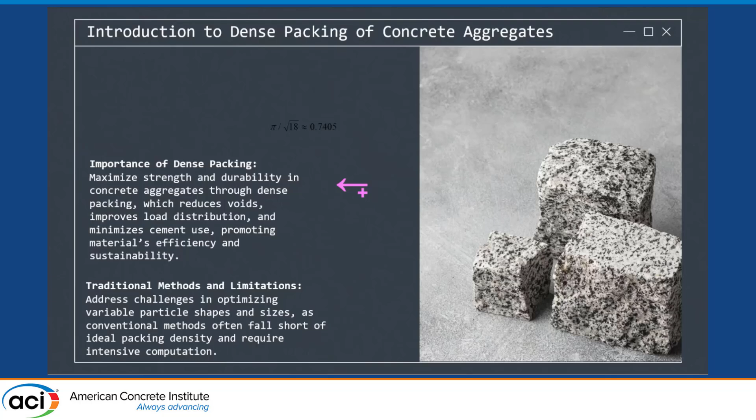And the idea of dense packing comes from, for example, Kepler, and he was discussing the packing of cannonballs, equally sized spheres, but even earlier, Apollonius, he was working on packing of disks, and he created these problems which we still try to understand and model better.

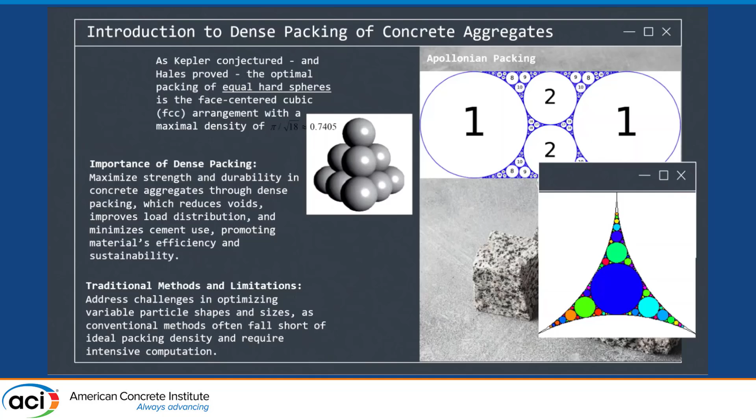Okay, mathematically, we can solve the problem for ideal packings of ideal disks and ideal spheres. And, well, the real world is a little bit different. So most of the time, we may need to deal with random Apollonian packings, which are not really perfect arrangements. And again, this is where we can use our algorithms, which can mimic nature and natural formations.

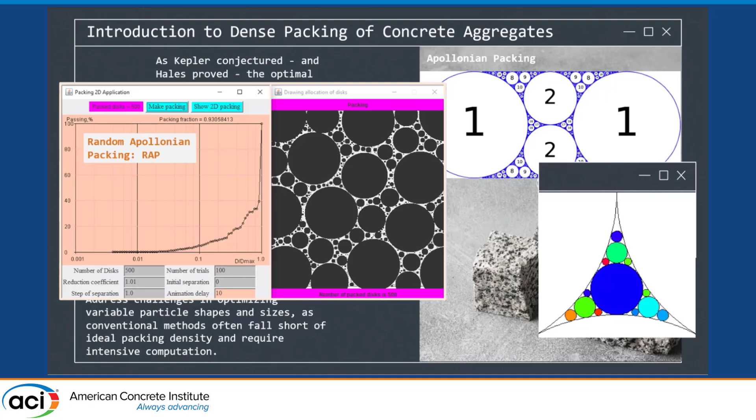And this can be used for concrete packing, understanding concrete packing and its importance, correlated to concrete properties. So the importance is very clear, because we try to optimize the packing, and our objective is to see if we can have better strength, or we can save some amount of binders. So Portland cement can be easily saved.

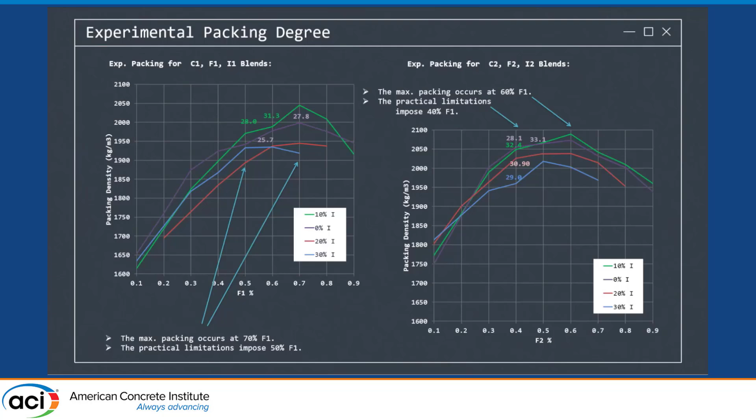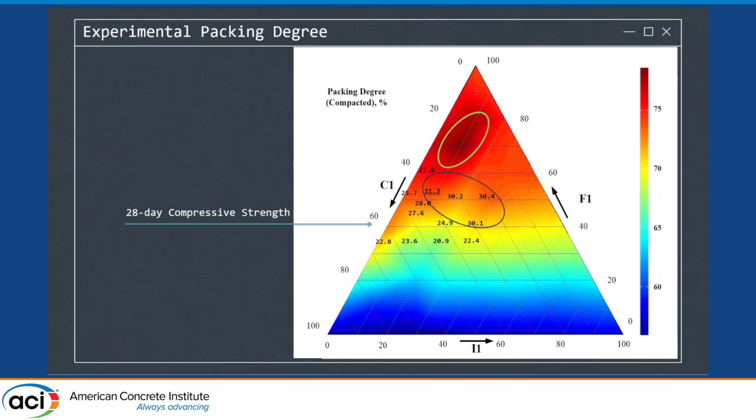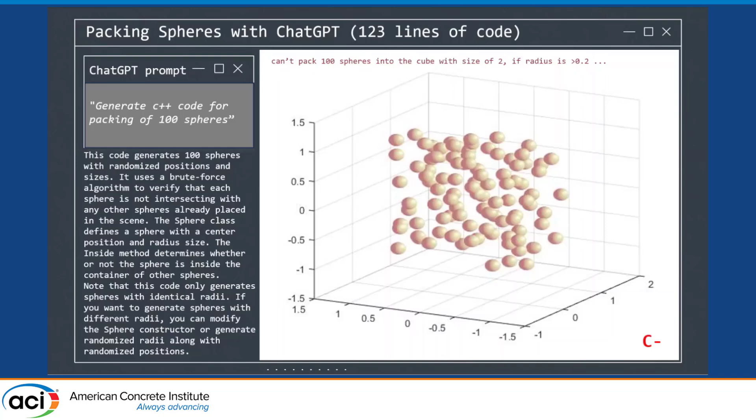And basically, the code is capable of doing some packing work, but really with some limitations. So 100 spheres were packed, but unfortunately, it cannot do better with larger spheres. So again, it was a good step, I would say, but if I gave my students such an assignment, it would be a C-, because it really doesn't show me what I want.

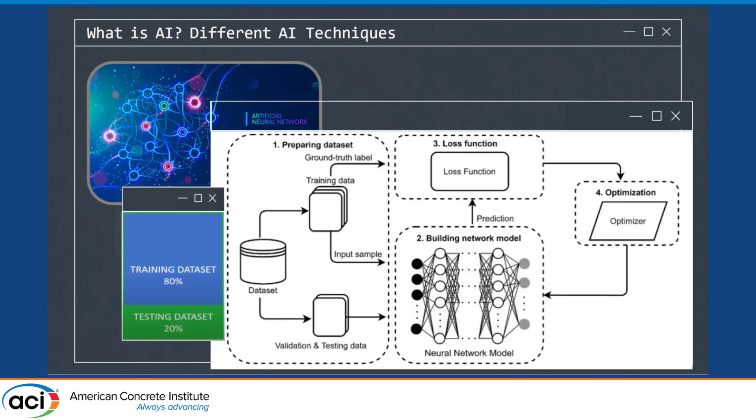So if we look for AI techniques which are available, artificial neural networks, which were very popular back in, I think, the 90s, now they are coming back as the major engine of AI. Basically, the mechanism is to use the data set and a neural network model, I have the next picture explaining it, which can go through training and optimization of the model.

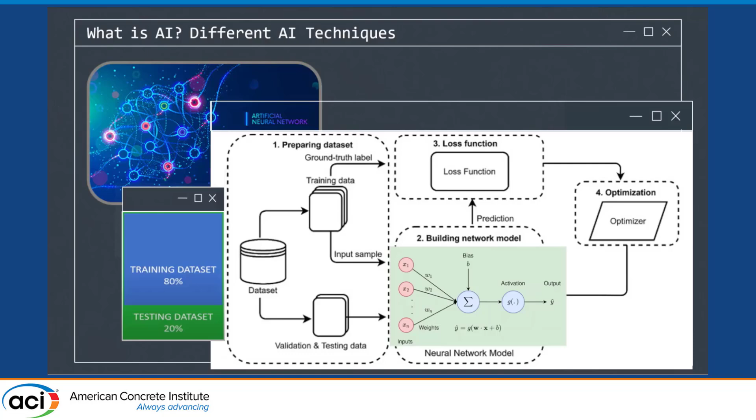It can create an equation, and depending on the configuration of the neural network, the number of nodes, and the weight coefficients, which very often are not reported in the literature, it can really represent your training set, and after that you can go and analyze it using your data set. Again, for this you need a very comprehensive data set which you can analyze and convert into the model.

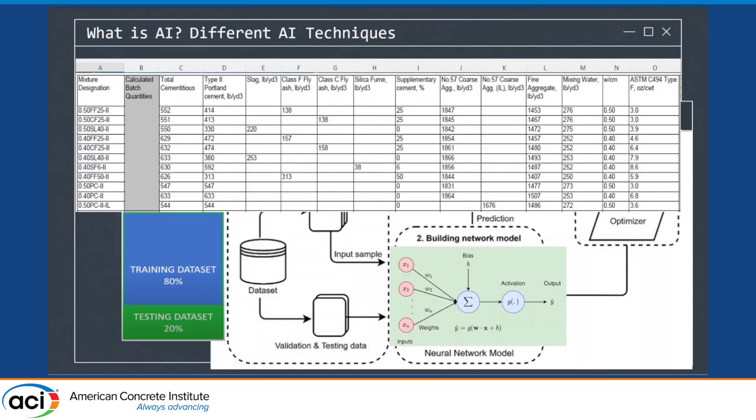So, okay, artificial neural networks can create perfect models of the reality we have, and they can mimic all the noise, all the deviations you may have, but so far I didn't see them used to work on basic relationships we have already established for concrete technology.

So what are other techniques? It should not be only ANN to deal with. And we really look at genetic algorithms. Genetic algorithms are another approach which we can use to optimize the system, and to solve sophisticated numerical problems. For example, we used a genetic algorithm in the past to find optimal aggregates,

to provide aggregate selection for the ready-mix manufacturer when we had 10 to 15, etc., different potential aggregate sources. And with the genetic algorithm, we were quickly solving and suggesting which sources to use based on different criteria.

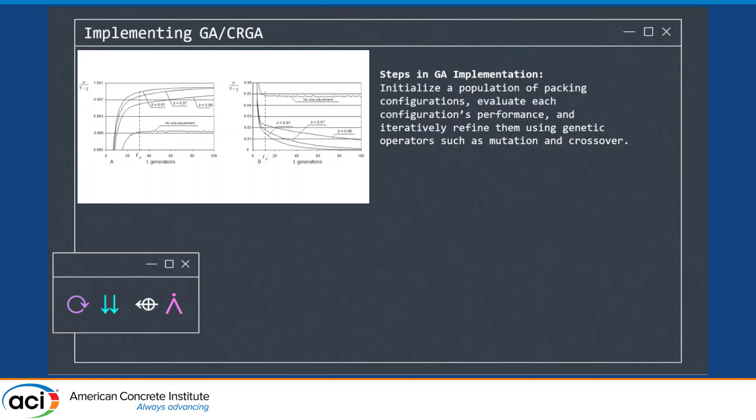So basically, we look for genetic algorithm, and genetic algorithm can be really used to optimize concrete mix, but you need to have a model, and it's a powerful optimization mechanism. We improved it further with a shifting and shrinking mechanism to optimize the solution and basically to find the solution quicker. So compared to classical genetic algorithms, we can have a better realization and better solution.

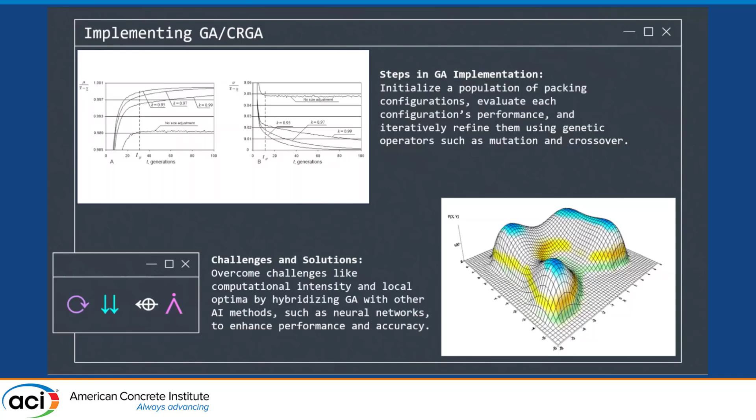Obviously, the major problem, if you have different maxima to find in an equation, this tool can be effectively used. So a very powerful tool which can be used to solve numerical problems. But the question is, you need an equation, you need a model to solve if you want to use genetic algorithm. So I'm returning back to my work on sequential packing algorithm, shortly called SPA, and this was the model, two-dimensional model, which I demonstrated before.

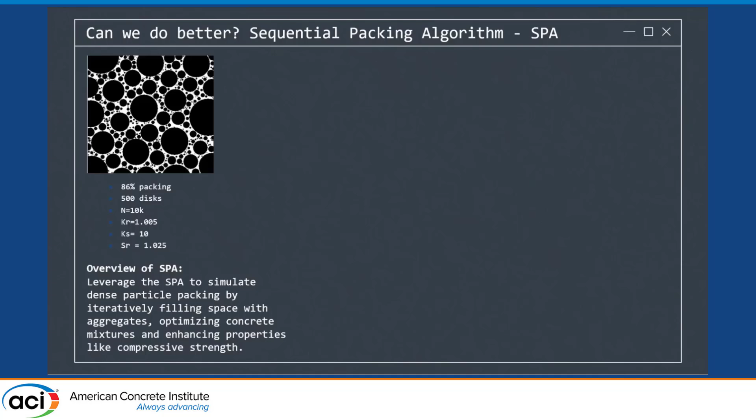So basically, the algorithm is more complex compared to this ChatGPT 123 lines of code. But the idea from ChatGPT is we realize a similar idea, but we have the ability really to arrange the particles in the way we like to arrange. So if we like to create random Apollonian packings, which are extremely dense arrangements, we can really create them. And of course, 3D, we're not interested just in 2D, 3D implementation is there. And normally, in addition to the number of packed spheres, we have 4 key parameters defining the algorithm run.

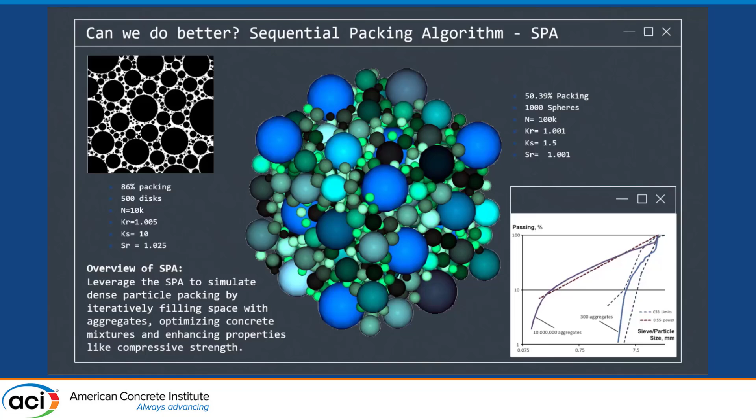Well, what we can do, we can also demonstrate the packing of only coarse aggregate fractions, where again, everything here is modeled as spheres. But we also can model very large assemblies. I think from 1 to 20 million particles is possible, and it is basically the number of coarse and fine aggregates in a 1 liter container, 1/4 container, say. And so Mother Nature can be really modeled in a relatively realistic way. Well, I will speak more about features of the algorithm, but here I really like to mention that we can create extremely dense packings.

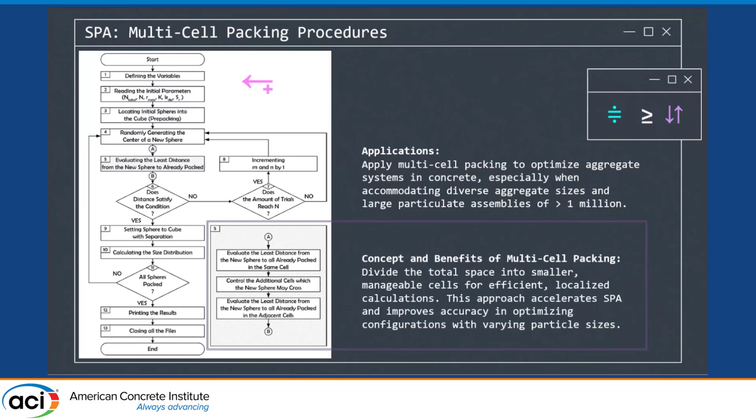So, what we did also to run the algorithm, because all the packing happens in the memory of computers. So we don't record every packed data into the file. And for this reason, we need to optimize the way the computer works, the way data are queried by the algorithm. And for this reason, we created different separations, divided the packed volume into smaller spaces, which especially helps us to pack very small aggregate particulate entities. And so multi-cell is a very effective packing approach.

So as a result, we realized very dense theoretical packings of aggregates, which are exceeding all our available packing curves. For example, DIN 1045 has packing curves A, B, and C, and also gap grading. We understand that gap gradings are not something we like in concrete technology. Sometimes they work, but most of the time we try to stay away from them. So if you look at this gap grading and this very dense simulation curve, they are somehow close to each other. We understand this dense packing of aggregates most probably is not going to work in concrete.

But there are some other simulations which I have here. They might be very useful for concrete technology. And I'll return back to these arrangements with next slides. So again, very dense packings. But what I like to say, these dense theoretical packings are achieved with relatively large, I would say at least maybe 50%, of size very close to maximum size. So again, practical advice, if you want to optimize your aggregate packing tomorrow, just have a significant portion of aggregate of relatively narrow size close to your D maximum. This will really help. And this can be tested.

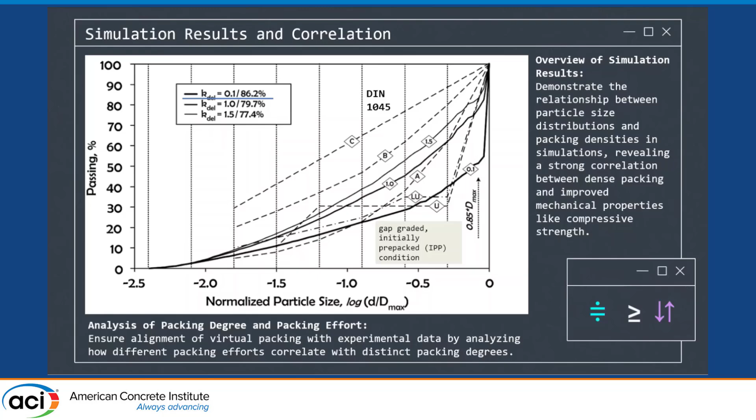So what's next? Well, genetic algorithm, how can it really help us? If you have this pre-packed assembly, and again, our algorithm is very good at capturing different patterns from very dense to very loose. And I will speak about loose arrangement a little bit later. But if you want to push it further, if you want to have a perfect fit of the particles, the genetic algorithm works in such a way that you create a sphere somewhere within free space, and after a number of iterations, the aggregate will move around and grow and fill this available void, packing it in a perfect shape.

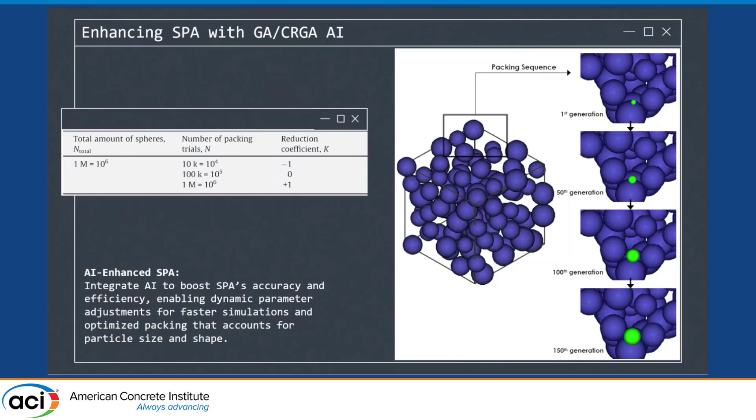So in addition to the power of the algorithm which we have, genetic algorithm can match the performance of SPA and enhance it, actually have a synergy, if we want to have extremely dense packing arrangements. Again, if we want to compare, you can see this is our classical SPA, and this is SPA with genetic algorithm. So again, very dense curves. They are on your right.

They are deeper, and the more loose arrangements are on your left and upper, and you can see the genetic algorithm pushes all of them to one single master curve, and this curve is your theoretical maximum possible density curve for spheres. And can we do better? Well, potentially we can; if we push it further, maybe it can shift a little bit right.

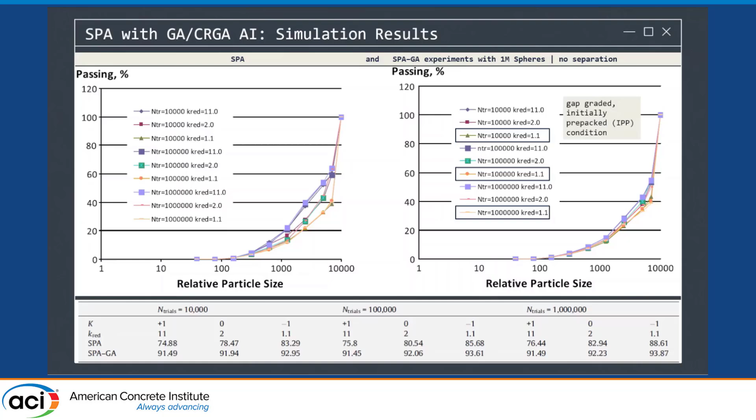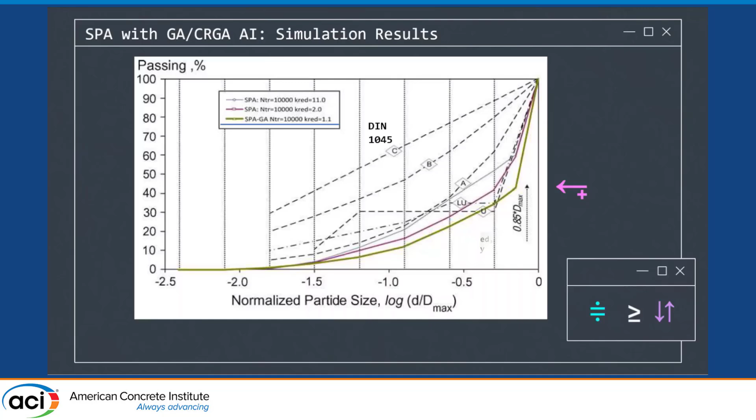And the question is, this is how we can define the best packing in terms of spheres. And again, what we discussed with you, most probably this is not what is happening. So again, if I put it on the DIN 1045 chart, you have A, B, and C curves, and these very dense packings are not really happening. So the question is, really, do we have the best packings in concrete? Do we need best packings, theoretical packings, in concrete? So this is a question here.

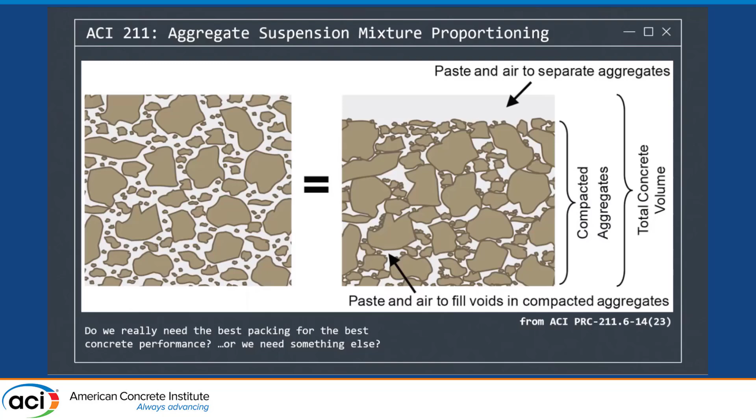And if we look at aggregate suspension mixture proportioning from ACI 211, we really recognize that particle separation takes place, and we need to take into account particle separation and the rheology of the mix. So again, we like to make this correlation of the best packing arrangements. And yes, this is what we achieve with our compaction methods. But we need to understand that those are not the best theoretically possible packing arrangements as predicted by the models. So here we need to understand the gap between theoretical maximum possible packing and what we can do with our aggregates, how we can move into the assemblies.

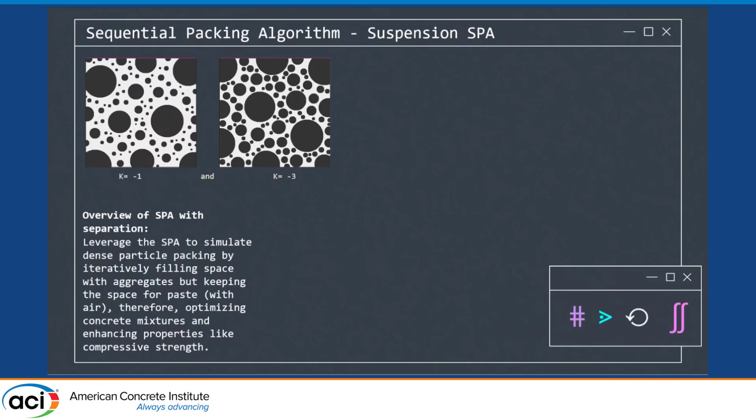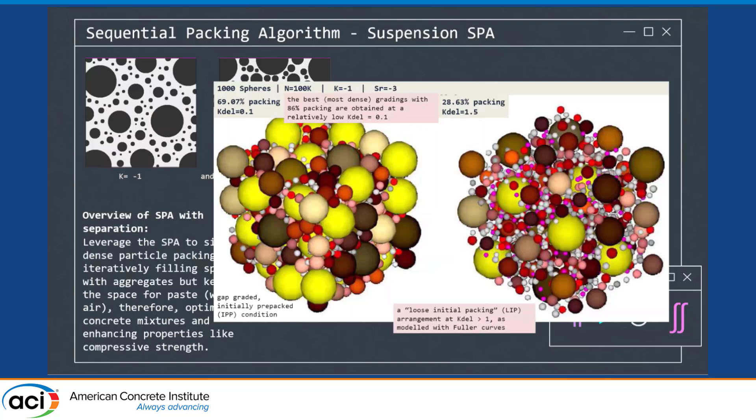So this is why we created SPA with separation, and we created the particle suspension model. So now we can create the spacings, the gaps between the aggregates, so the cement paste can really come into play, and you can now model not just simply aggregate assemblies, but aggregate plus paste arrangements. And now from these extremely dense arrangements, which are impossible to achieve in concrete technology, we come to something which we use every day, which is really not the densest possible arrangement of the particles, but very practical.

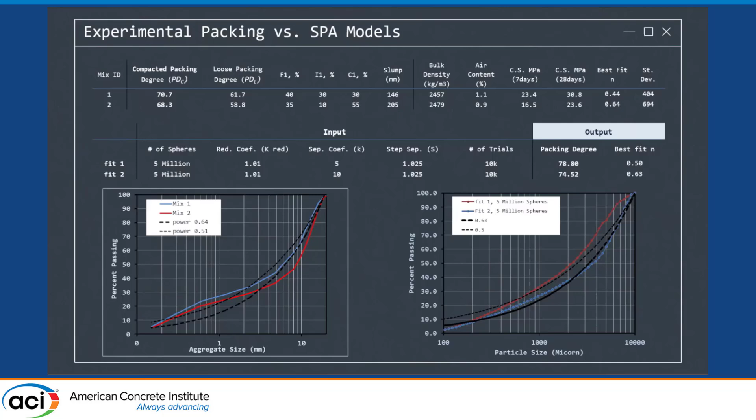So if we look again at use of this algorithm, those are practical blends which we created for the project, which were the best for the particle size distributions, and those were the models running to achieve very similar gradings, I mean, similar in terms of close to the power curves. And this was the experiment we ran, and the optimized algorithm can now run in a cycle to best match the specified particle size distribution curve. It can be a power curve, it can be any realistic curve, so we can model what we really use in concrete.

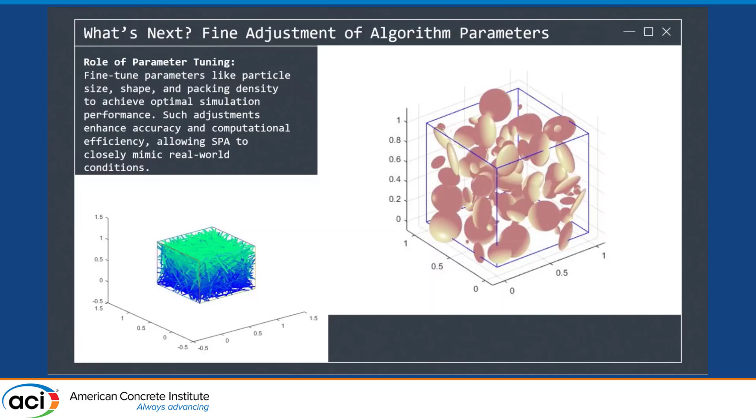So can we do better? I always get the question: okay, you play with spheres, real aggregates are not spheres, and we've seen from previous slides they really have all the varieties. Well, if I want to model packing of each individual particle as we use in concrete technology, it will require exceptional computational power, but we can still do it. There are approaches, and the closest approximation can be packing of ellipsoids. We can also run it. It just requires more computational power, and it will be difficult to push for 20 million as we have for spheres. We can also do fibers, nice packings of fibers using a very similar approach.

And the idea is, the algorithm which we have can really push the boundaries, model something which is theoretically possible but not practically achievable, but we can also use the same algorithm to model what we have in our concrete technology. Here I was supposed to talk about AI. AI is still in a very initial stage, and the hunt is for the proper data set, proper input into the AI. I believe that we need to verify our models, and those models have to be incorporated with AI, with the computational methods available in our toolbox. In this way we can succeed. And this is basically my main message today.

And again, slides were created by AI, so you have a little bit weird appearance here; I think it was coming from Portuguese. And well, if there are any questions.